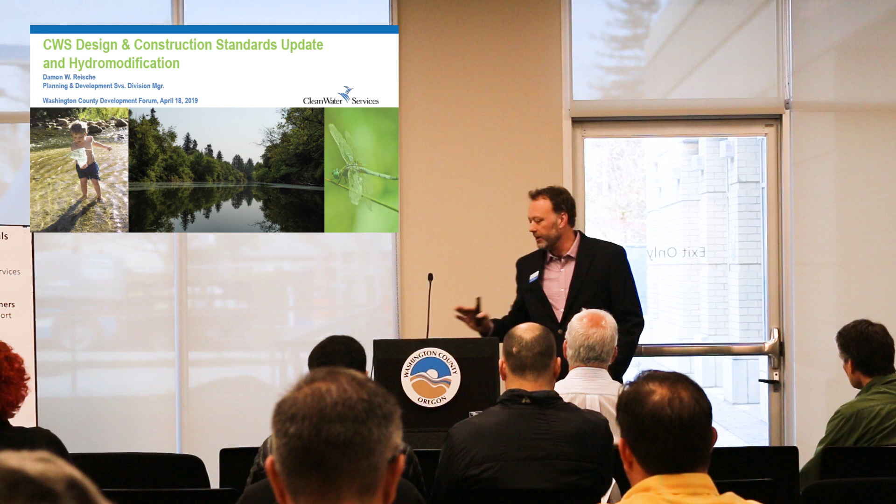So I like to begin with, what is hydromodification? Who knows what hydromodification is? I always like to get a sense of who in the audience has a feel for that. You're just not raising your hands because you've seen me play this trick on people before where I call on you.

I'll explain what hydromodification is. Hydromodification is actually pretty simple. It's just a complicated word for the change in runoff that occurs when there's a change to the landscape. When we talk about it with regard to development, we're really talking about that change from being a pervious surface with vegetation on it to an impervious surface where there's development. And what occurs as a result is you have more runoff and faster runoff as a result of that impervious area.

That can do different things. One of the things that's talked about a lot with hydromodification is increased flooding downstream.

Oh, because you want to record, huh? All right, well, maybe we can do that.

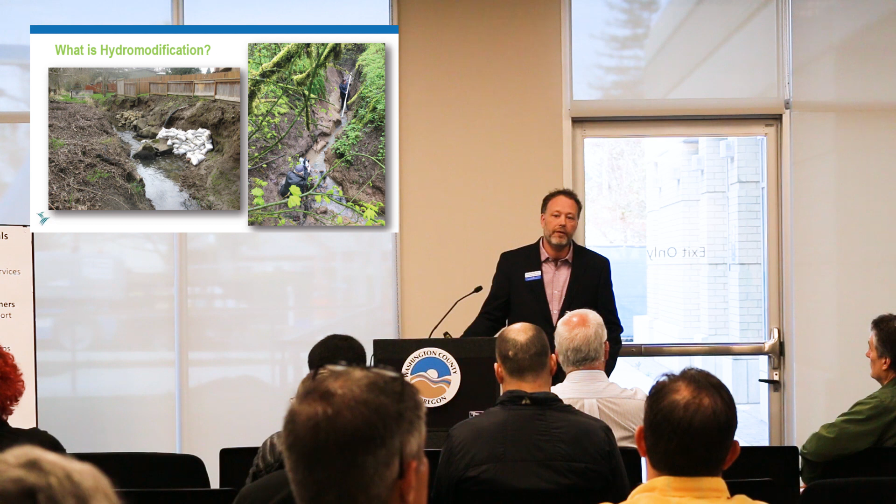So that increase in runoff can cause flooding. That flooding is one of the things a lot of property owners worry about with hydromodification. Another thing that occurs is downcutting or erosion of the stream channel, and that's what these pictures show here. That can be a threat to infrastructure like sewer lines that might be crossing under that creek, and of course we don't want those exposed where they might break and start to leak into a stream. But that erosion actually is a water quality issue as well for the fisheries downstream.

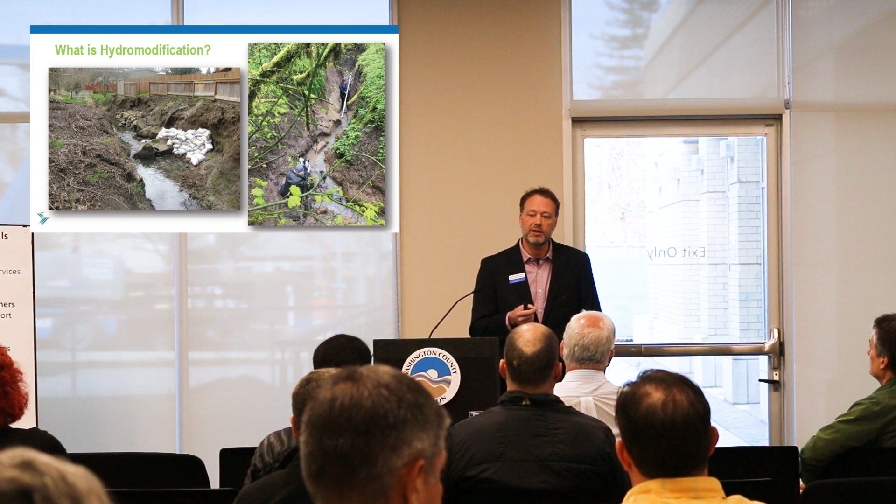And our permit was updated, and we were required to have standards to address hydromodification really with an eye towards that water quality component. So in 2016, we got a new watershed-based National Pollutant Discharge Elimination System permit, or an NPDES permit, issued by DEQ. It is a federal permit under the Clean Water Act. It covers 5 discharges that happen in urban Washington County that Clean Water Services is responsible for.

4 of those discharges are from our treatment plants. The 5th discharge is from the Municipal Separate Storm Sewer System, or the MS4 system, and that's all the various stormwater discharges that come out of our storm pipes into creek systems. This new permit that we received on April 22nd of 2016 had a requirement for us to do many, many things, but there were three things that necessitated updating our design and construction standards.

The first two things we did on April 22nd of 2017. That was the first anniversary of the permit. And the triggers for when we had to have these things done were on the permit anniversaries. So the first two were the 1,000 square foot treatment threshold for stormwater management. We had had lower thresholds for certain types of development in the past, but for single-family homeowner type projects and very small partition type developments, there wasn't actually a treatment requirement or a threshold that they were triggered by. So that got added in 2017.

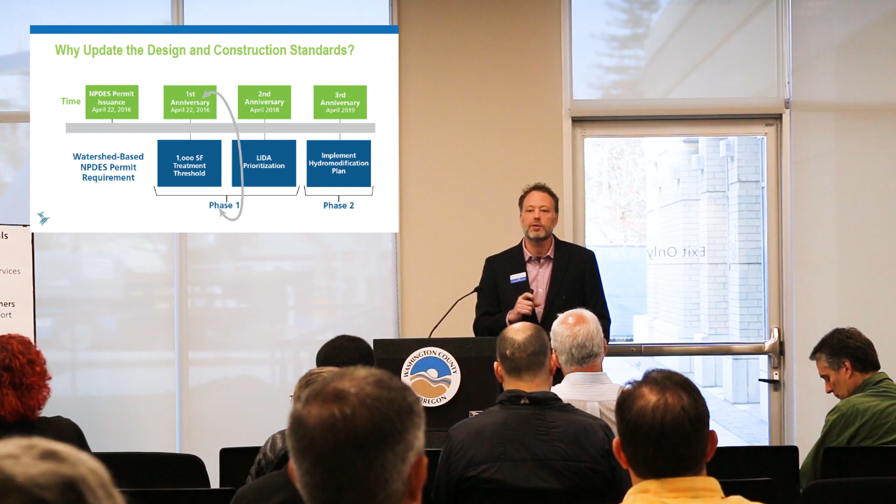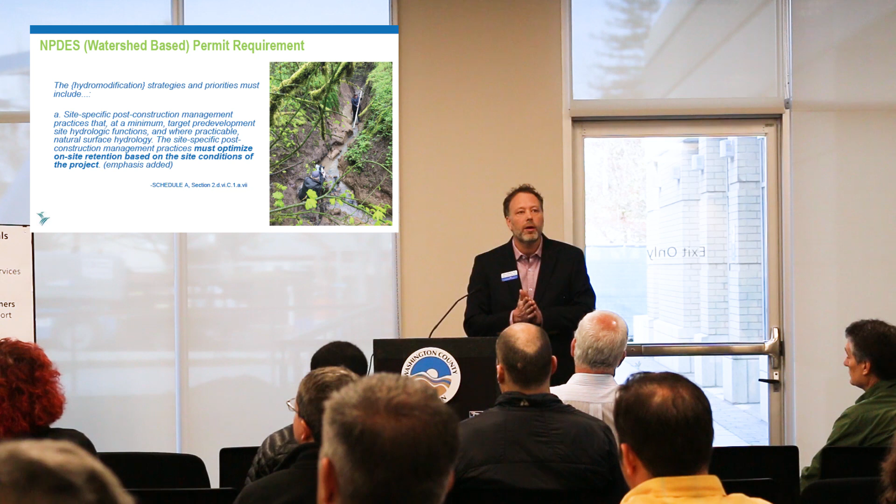Our approach to hydromodification that we initially proposed is a little bit different than that, but still in keeping with it. What we've talked about since 2016 is wanting to implement a sub-basin approach or a regional approach to addressing hydromodification. A very typical way of tackling hydromodification is just to do upland ponds on each site. While that does a fairly good job of preventing additional impacts from occurring, what it doesn't do is address degradation that's happened to the stream channel over time.

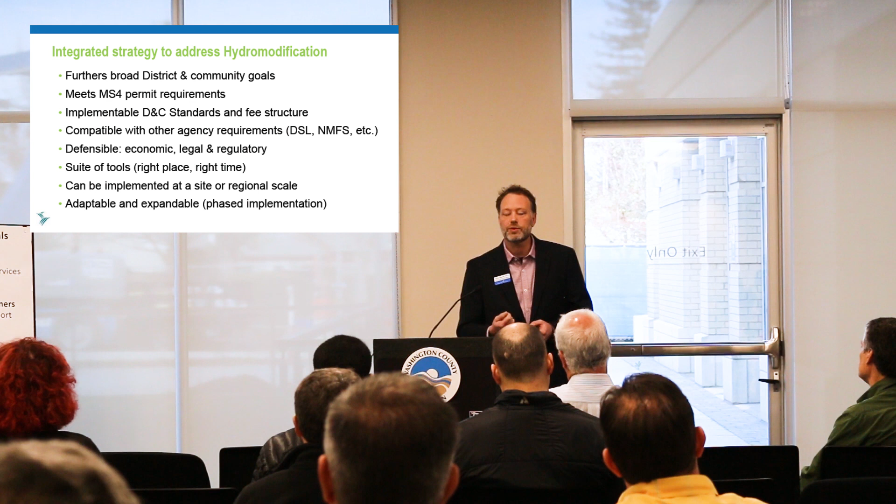So we came up with this thought of how can we do stream enhancement to protect the streams, make them more resilient to these new flows in combination with upland controls. We've piloted that in North Bethany, which we consider a sub-basin planned area. If you're familiar with North Bethany and the stormwater management up there, you have a lot of low-impact development approaches, these street-side planters or planters inside a subdivision or in some cases on individual properties, that are geared toward addressing water quality, but they also provide a little bit of flow attenuation or slow down how quickly things run off.

Then we have upland regional ponds that various neighborhoods drain to, and there's probably somewhere on the order of a dozen of those throughout North Bethany. And then we've also done stream enhancement projects. So our goal was to use a combination of those tools to address both water quality and the stormwater volume management or hydromodification.

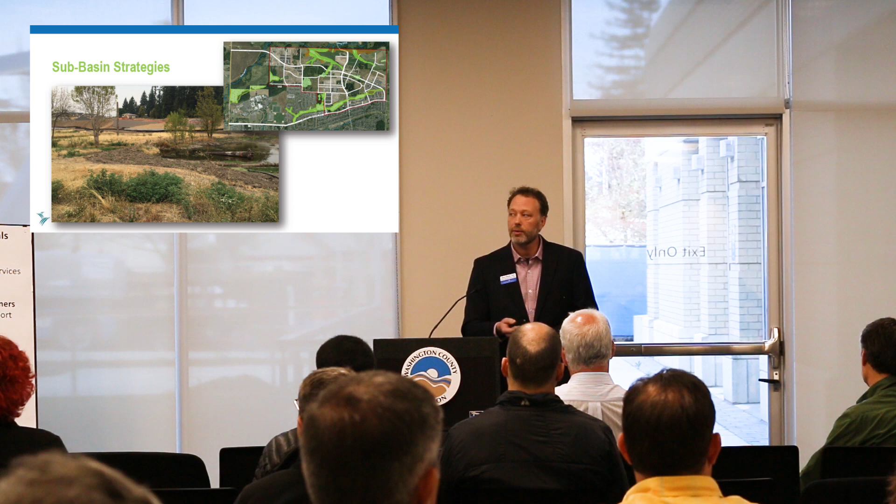What we learned from North Bethany is that it is very complicated, difficult, and time-consuming to both develop a sub-basin strategy and to implement it. We're still very committed to that, but we weren't going to be able to come up with sub-basin strategies for the entire district by April 22nd of this year. So what we proposed to do in order to meet our permit requirement was to implement what we called the base strategy to address hydromodification.

This is very similar to strategies you see in other jurisdictions around the Portland metropolitan area. And it's intended to be an interim step. This is a placeholder as we develop sub-basin strategies. And as we develop sub-basin strategies, areas will switch from having to use the base strategy to then plugging into whatever the regional approach is for that particular sub-basin.

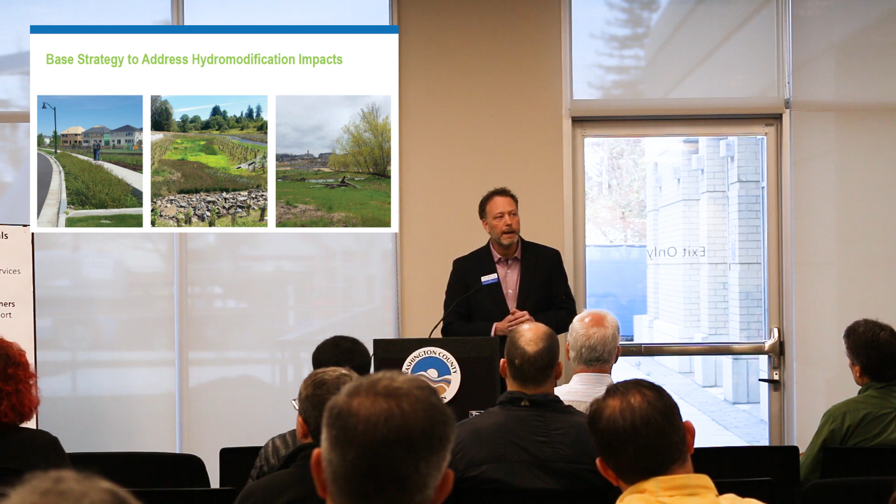Before I get into more of the detail about the base strategy, one of the things that rolled out just prior to the base strategy in November was an implementation policy. The implementation policy was really intended to give development a little bit of certainty about the projects that were already in process. We recognized that hydromodification standards were going to be a big change over what we already had and could impact projects more on a scale that land use decisions typically affect projects, as opposed to engineering requirements.

With that change, we wanted to make sure that projects that maybe were already developing plans to make submittal to land use before our standards went into effect would have some assurance that they weren't going to have to go back and start land use over. So we went around and talked to the various land use jurisdictions within our service district and basically came up with a threshold that's a little different than what we've done in the past with the design and construction standards.

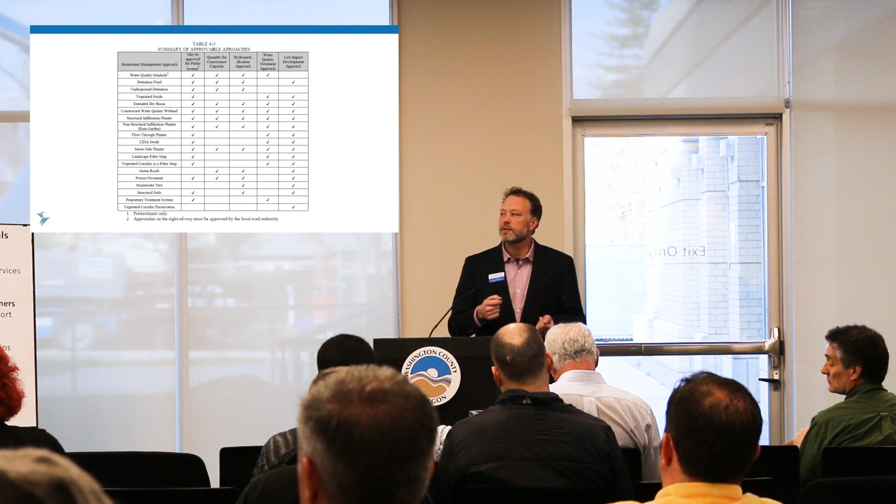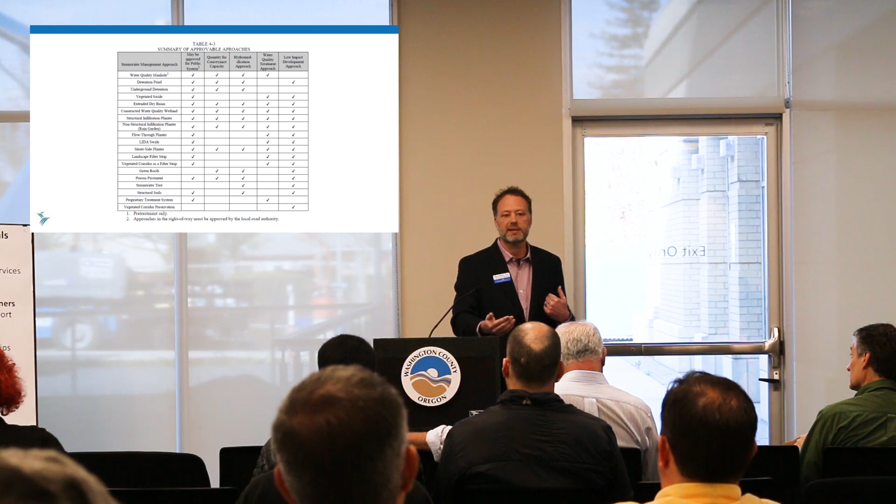So we created a map tool. I'll show a screenshot of here in a minute. But what you have to figure out in order to use this map tool, which initially is a pre-screening tool, is where is your project, how much impervious area is planned. That lets you figure out your project size, and where does the project discharge into the stream so that you can look at that stream channel to see whether it is low, moderate, or high risk for hydromodification impacts.

And I apologize to the people that are in the way back. I'd point at one of these other screens, but the dots don't work on the video monitors.

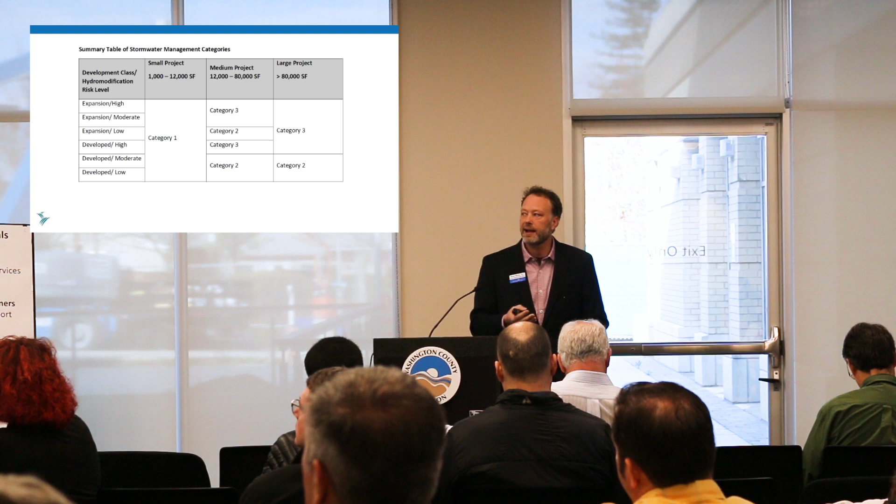Medium projects that are essentially low or moderate risk and more on the side of being in developed areas are in category 2. And then when you're sort of in those highest risk areas, you're category 3. Now, I'll give a quick summary here of what those categories look like.

So category 1, you get a choice between doing infiltration LIDA, and there's an option to do a simplified sizing method, which is just a 12% facility size based on your impervious area. So 12% of your impervious area is what your facility size is, much like we do for LIDAs on water quality with 6%. Or you can choose to pay the hydromodification fee in lieu. And I suspect most folks are going to go with the fee in lieu in this case. However, we thought there might be some homeowners that would be interested in doing a rain garden or a planter on their property, and we wanted to make sure that we left that option available to them.

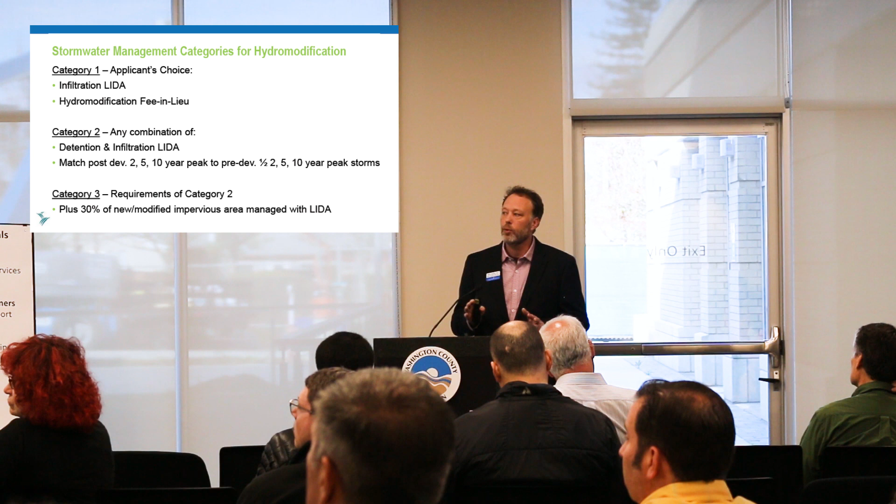For category 2, so this is for projects that are over 12,000 square feet, you're required to use a combination of detention and infiltration LIDA. So that can be anywhere from entirely infiltration LIDA to entirely using a pond to some combination of the two. Doesn't matter. But what does matter is getting to a point where your post-development runoff for the 2, the 5, and the 10-year peak storms, those peaks are matched to the pre-development runoff of the half the 2-year, the 5, and the 10 respectively.

One important thing to note about what that pre-development condition is: it's prior to making your land use application. So some jurisdictions actually talk about Lewis and Clark or a site that is 80% forested. We're really looking at what was the condition of that property before you started to move into development with it.

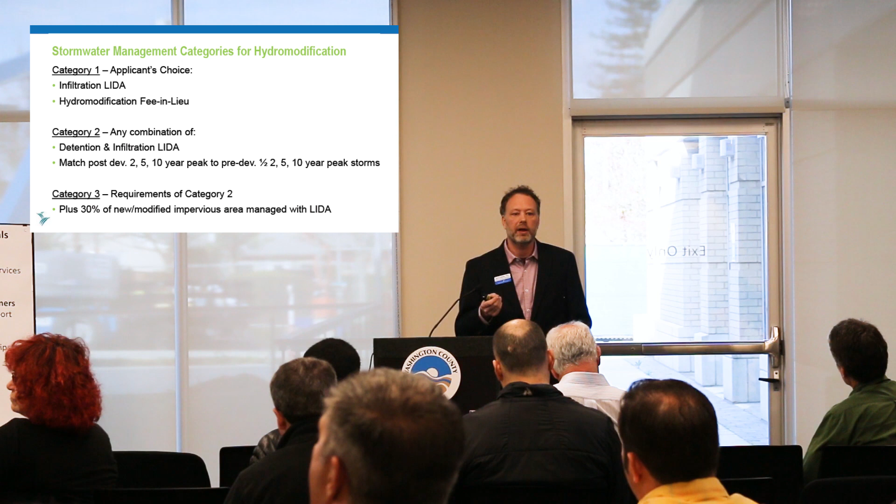Category 3, you have to do the same thing you have to do for category 2, match those peaks, but it has the additional requirement that 30% of the new/modified impervious area has to be managed with LIDA. Now, that's not to say it has to be infiltration LIDA. It may be LIDA that just addresses water quality, but 30% of the impervious area needs to be managed with low-impact development approaches. Questions on that? I know that's a lot. Okay.

One of the other changes to the standards that is significant, and really this is in addition, is we added a number of various approaches to both address water quality and hydromodification. And this table from the standards is really just a summary of all those different stormwater management approaches on the left. And then across the top, it covers what those different approaches might address so that you can quickly look up and understand whether it's applicable to hydromodification, water quality, conveyance capacity, whether it can be a public facility or a private facility.

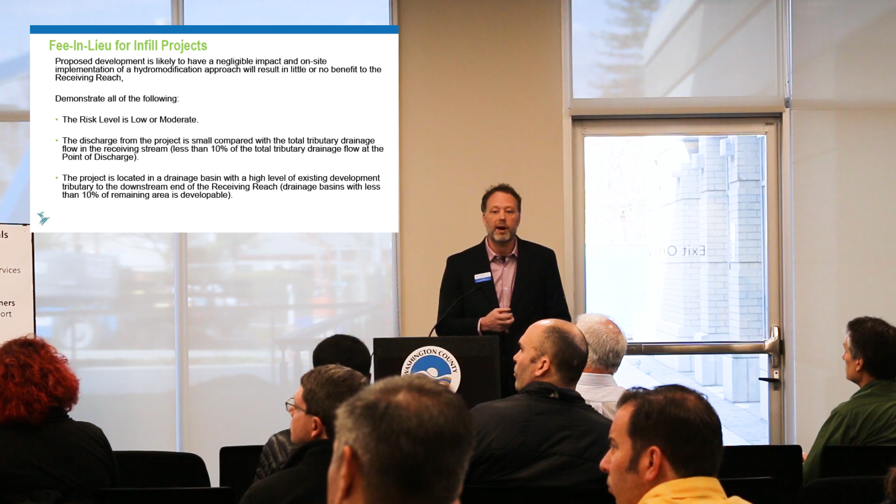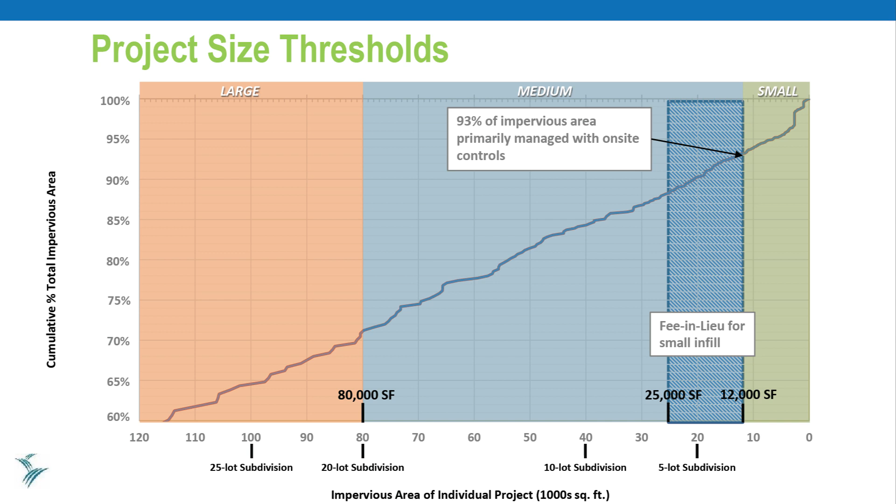So in that sort of pinkish color, you've got large projects, and you'll notice that over on the far left, somewhere between 110,000 and 120,000 square feet is what the very largest projects generated in terms of new impervious area. And that was about 60% of the total impervious area created in Hillsboro and unincorporated Washington County at that time. So as you move towards the right and that break at 80,000 square feet, somewhere around 72% of the impervious area being created was from projects that were 80,000 square feet and larger.

That medium category from 12,000 square feet to 80,000 square feet is that next section. And when you add that up with the large projects, you're getting somewhere in between 85 and 90% of all the impervious area being created. And then finally, the small category is that last maybe 7 to 8% of impervious area being generated.

So when we think about those categories and size breaks, that small green area is the area where applicants have the choice to either do fee in lieu or do some sort of on-site facility. That large blue area, not the hatched blue area, that goes from 12 to 80,000 square feet is that category 2 area where you're having to do the peak matching. And then finally, the pink area, the large, is that peak matching with the additional 30% management by low-impact development approaches.

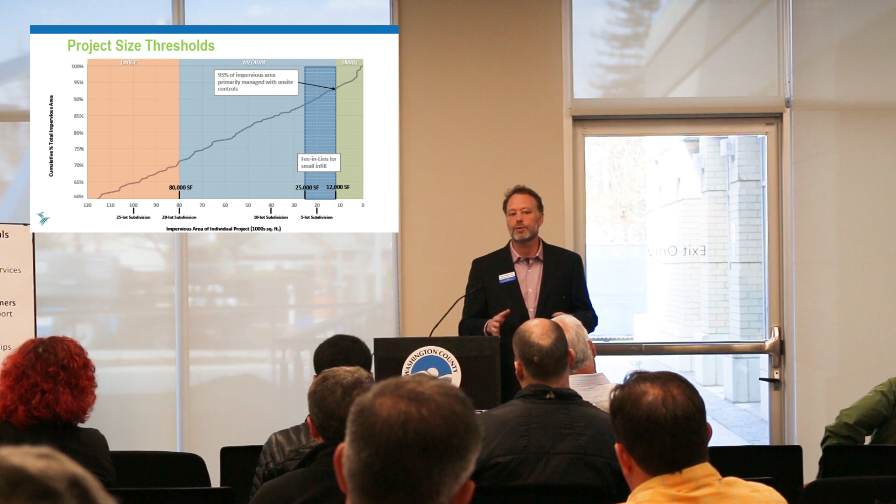And there's been some additional language added to indicate what sorts of parcels you might remove when doing that analysis. Things like cemeteries, while they may be pervious and could be turned impervious as a result of development, they're not terribly likely to develop. So those wouldn't be counted in the analysis. Those areas would also be able to do a fee in lieu as opposed to having to do something on site to address hydromodification.

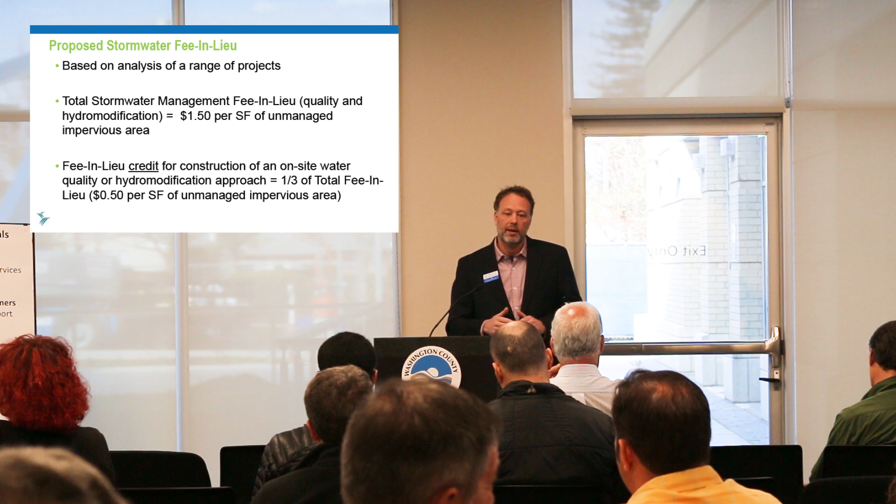And I just want to mention that while these fee in lieus that we're discussing here are specific to hydromodification, water quality will still be required on site in the same way it has been for years. So we haven't made any changes to that.

While the new standards did not adopt a rate for hydromodification fee in lieu, we are working on developing that, and we'll need to include something in our update to rates and charges, which will go before the board in June. This is typical. Every year we update rates and charges around this time of year and take it to the board in June, and it is effective on July 1st.

We started out looking at these hydromod fee in lieu categories. We did a bit of an analysis looking across the board at different types of projects that could be used to manage stormwater and hydromodification. So we looked at a full range of everything from that on-site water quality, quantity, planter box or rain garden, to detention ponds, to stream enhancement projects. And that's quite a range when you start to break it down to a per square foot area managed.

The other thing that we saw is even when you look within a particular class, say a detention pond, you can get a very broad range of different unit costs based on just the topography of the site. So we attempted to take something that was in the middle, maybe skewing a little bit towards the smaller side, recognizing that the way the standards are right now, it's more small projects and maybe homeowners in particular that would be taking advantage of fee in lieu. And we came up with a proposed rate. And there's a fact sheet on our website that discusses this in a little bit more detail.

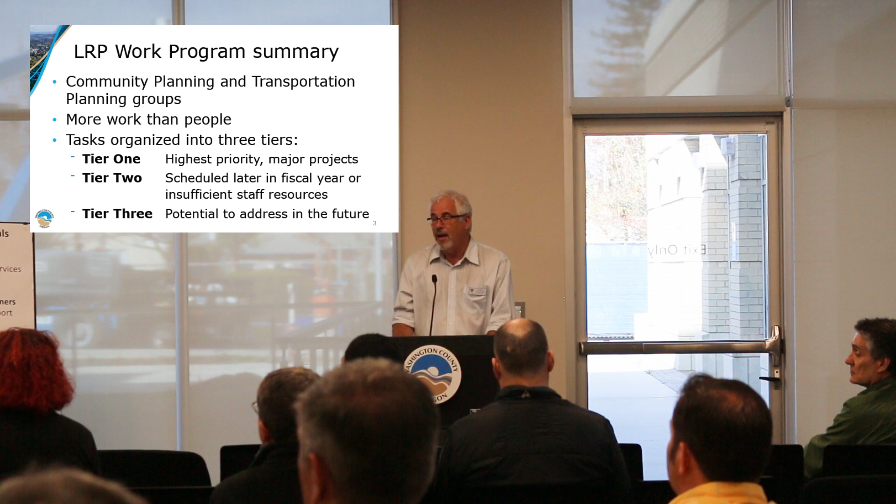Generally, we have more work requested of us than people, and so because of that, we have to go through this exercise to figure out how we're going to prioritize the work. So if something shows up as a Tier 1 task, there's a commitment to do it. Tier 2 are things that are committed to, that they're worth doing, but we just don't have the resources to do it, and other things are a priority. If something ends up in Tier 3, it's likely not going to happen anytime soon.

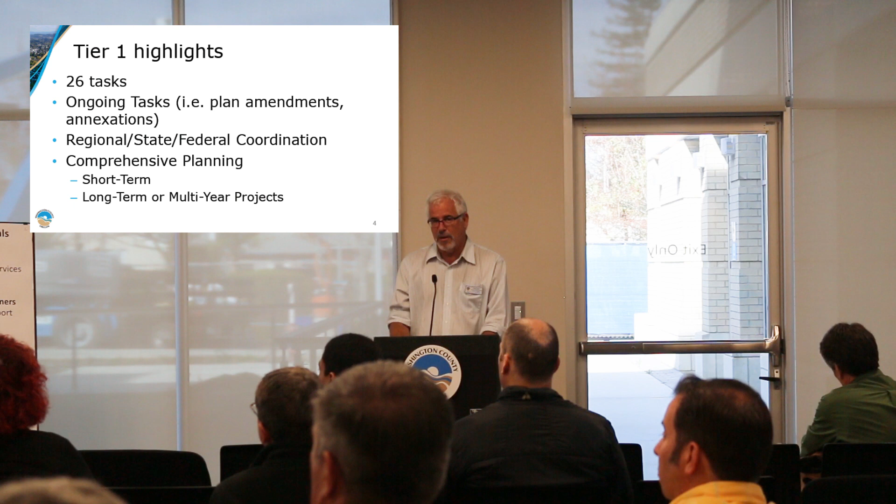So in Tier 1, we ended up with 26 tasks. Some of the things are ongoing, things like plan amendments. Somebody shows up and requests a plan amendment, we process that application. If you want an annexation, we process the annexation. So a lot of regional, state, federal coordination done with long-range planning. They spend a lot of time at Metro and ODOT trying to make sure that we're doing things in a similar fashion. And then within comprehensive planning, there's short-term projects, and then there's a lot of things that take 2 or 3 or 4 years sometimes.

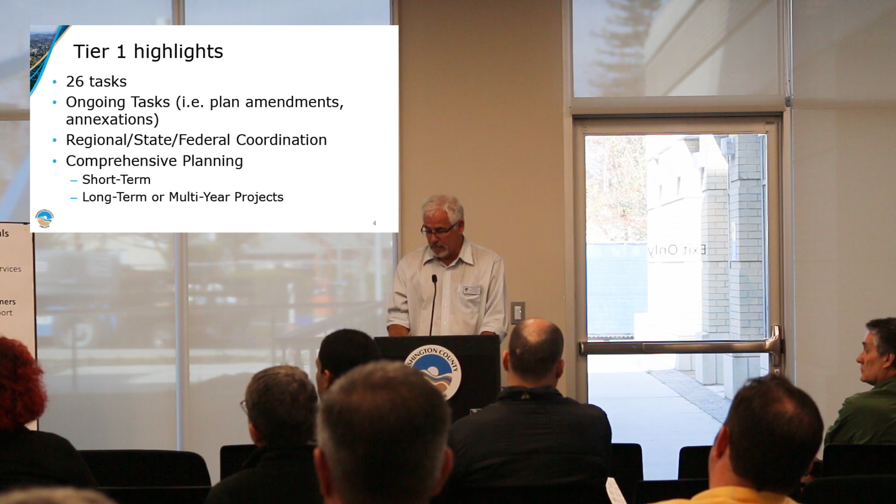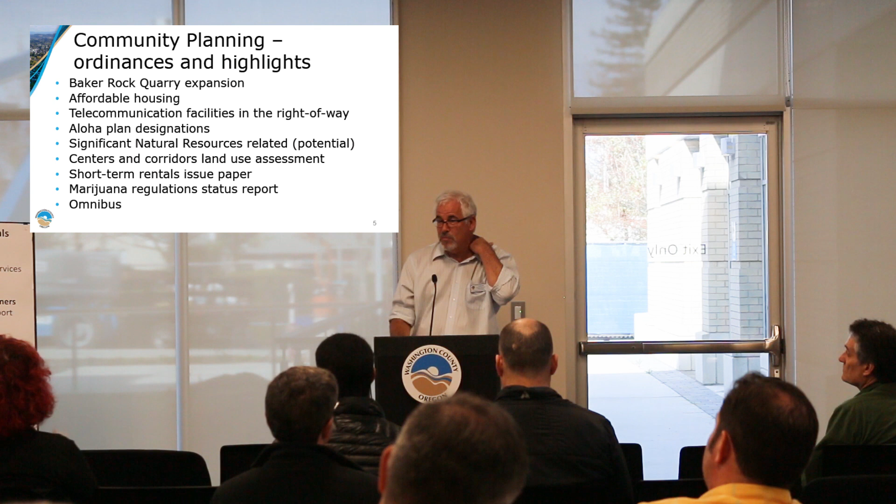We're doing some work on centers and corridors, which is essentially in 2040, there's a focus on putting more density in those places. So this is just an analysis of those areas to see if we can accommodate more things. Short-term rentals, the county currently doesn't have any ordinance in place if you have an Airbnb or VRBO. So we've gotten some complaints from neighbors who live next to those. Marijuana regulations, it's been up for a couple years. This is essentially just a status report to see if there's any changes we need to do. Omnibus is kind of a catch-all ordinance we do every year for things that are sort of not major, but definitely require their own specific look.

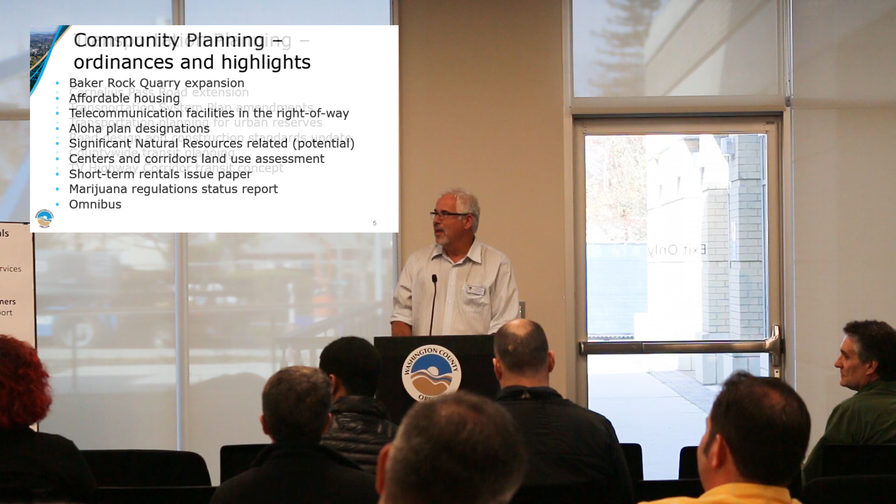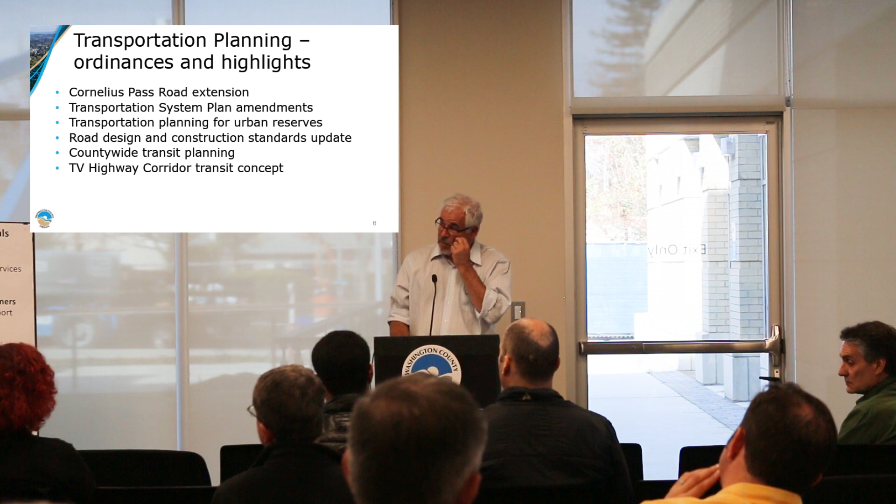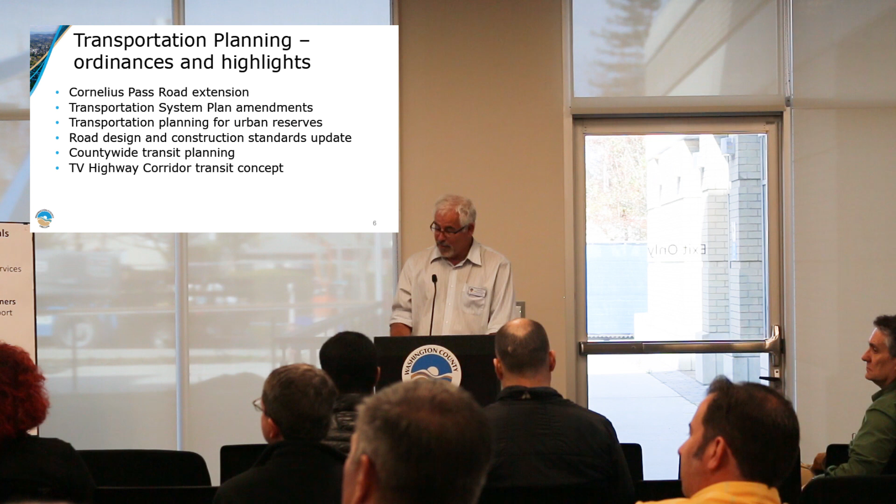Erin Wardell, raise your hand. I'm not going to bring her up here in the interest of bagel eating quickness, but here are the transportation planning ordinances and highlights from the transportation planning section. The one thing I am going to point out that is going to impact the development community is we're taking a new look at our road design and construction standards. So this is also clearly something that the county engineer will work on with transportation planning, but that could result in different standards for different roads. So that's something we can certainly get to you in terms of more information. But Erin's here if any of these things go, oh, what does that mean? So feel free to tackle her after I'm done here. That's all we have on that.

I do want to highlight a couple of other things before we jump into just networking. One is, the county has set up 2 new divisions in the county engineering capital project group. Before it was just under one county engineer. So we're setting up 2 new divisions for those of you who deal with our folks at Walnut Street. The new capital project manager and county engineer are, I'm not going to say it because we're a couple weeks or less before releasing that information, but know that there's a little reorganization going over there.

Another thing I do want to mention, and again, I'm going to be somewhat secretive about this, is we've been working for the past couple of years developing a new permitting system called Accela. So Permits Plus is on its way out, and Accela will be here hopefully within the next couple months. I'm not going to tell you the specific date we're shooting for because we don't want to tell you that and then not reach it. But we think we're 99% there. Once we're certain that we're going to implement it on that date, we'll let you know. It could cause some disruption for a couple of days as we transition over in terms of permit processing, but once it's up and running, it'll be a much better system and allow you to stay better informed of where your permits are in the process.